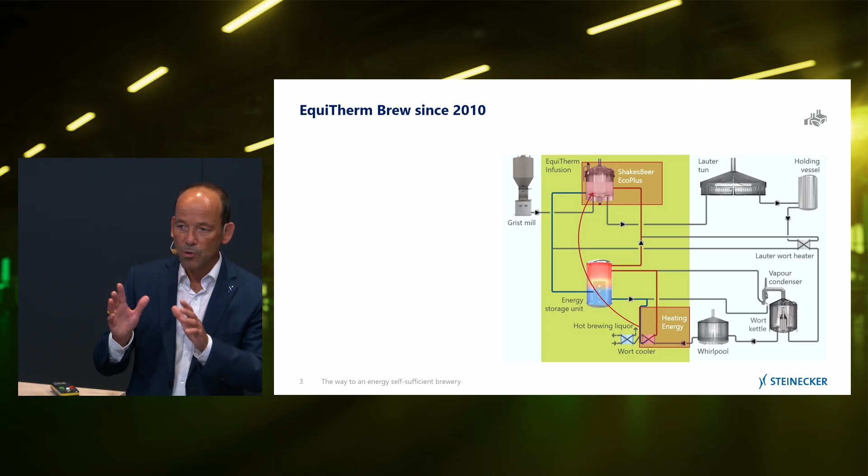So in the year 2010, we introduced a second energy balance in the brew house, reusing surplus heat energy from the wort chilling process for heating the mash tun. So the mash tun is not supplied anymore by steam from the boiler house. Only the wort boiling is supplied.

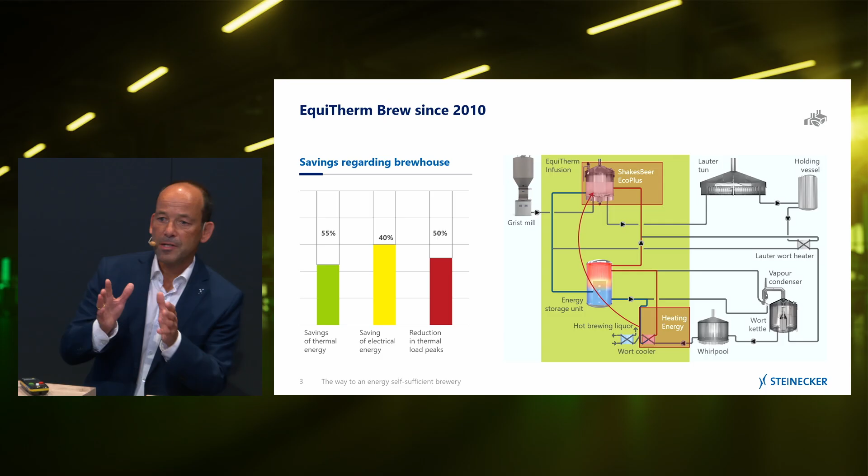So we can save a lot of thermal energy, also electrical energy in terms of cooling, because we do a part already in the cooling process with this energy balance. And what is also very important, we have only this one consumer, so we don't have peak loads to the boiler house. So the peak loads are reduced, therefore we can also reduce the capacity of the boiler.

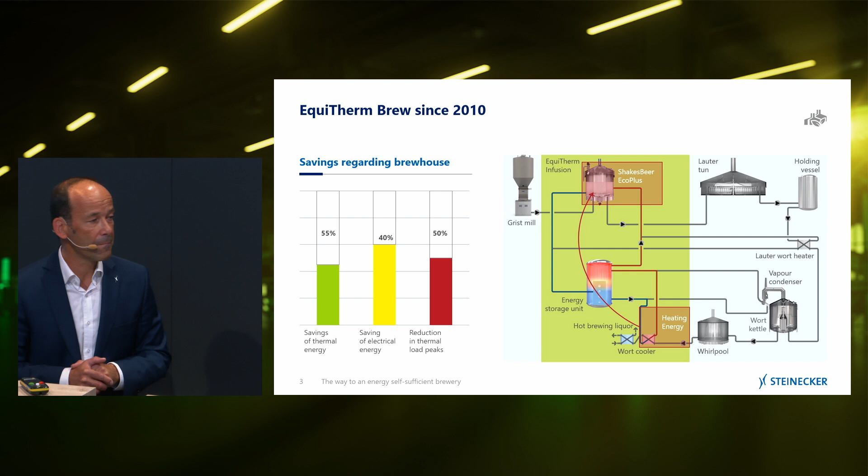And the same idea we had with Equitherm, we spread it out for the whole brewery with our Krones network of experts from Flensburg, Neutraubling, Freising and Rosenheim. We developed a holistic concept for the whole brewery. And really, this concept is able to produce self-sufficient beer. Not only produce, also filling.

Sounds really good, but now we see 2010, 2016, that's a couple of years ago, of course. Is this an established technology standard by now? Yeah, the Equitherm is well established. Around 100 million hectoliters of beer are produced yearly with Equitherm, and each brew house we send to our customer is Equitherm or at least Equitherm ready, meaning in a second step it could be easily retrofitted from a steam supply to a low temperature hot water supply.

Okay, and I love the graphics here on the right side. It looks like a closed loop to me, which is usually good. I have learned that by now. But for the non-engineers here, could you walk us through the process quickly?

Yeah. So one of the basic ideas is to use the energetic potential of the biomass which we get during the brewing process. So from malt, spent grain, malt dust, and so on. We convert this biomass to biogas, and then with biogas we feed a combined heat and power plant.

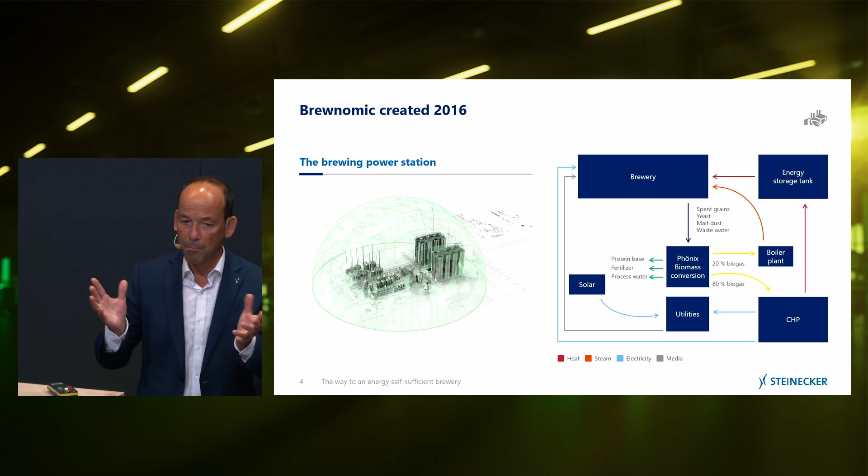And with this machine we produce enough heat energy and electrical energy to supply the complete brewery. And you said that breweries can become self-sufficient in terms of energy, and this is exactly how it's done? Yeah, it's not so easy as it's shown here. But it's like in a private life.

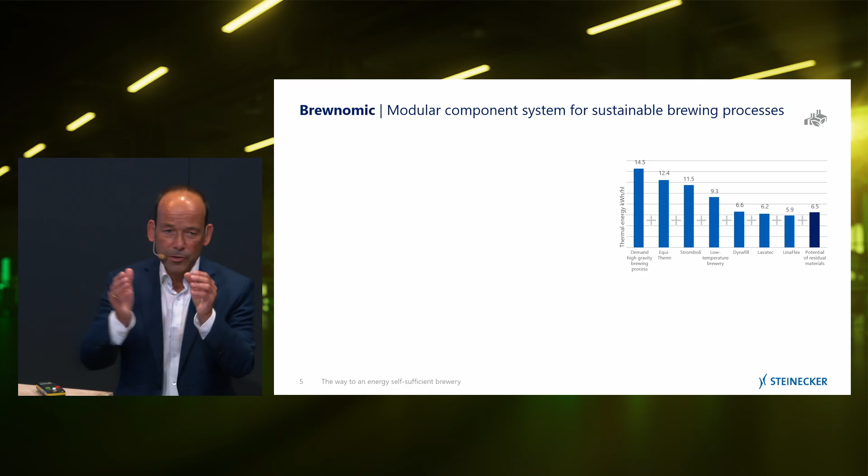If you want to heat your house with a heat pump, you should first reduce the heat demand of the house. So insulate the walls, invest maybe in high insulated windows, and then you can choose a smaller heat pump, and this covers the whole demand. And the same idea we use. So we invented a bundle of measures to reduce the demand of heat, but also of electrical energy. So we drew really to very low figures.

And because we have so many possibilities to achieve these very low figures, we can also create a development plan for existing breweries to bring them to Brewnomic standard. And the second core idea is we introduced a central energy storage tank in the brewery, and this storage tank divides or separates the demand, the consumers, from the supply. So all load peaks which the consumers create, we can completely buffer by this central storage tank.

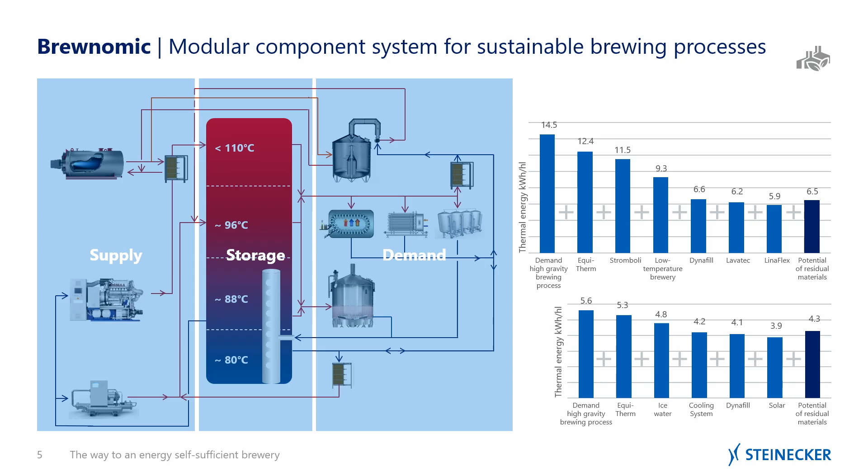So therefore, the boiler house can be designed small. It just has to cover the average consumption feeding into this buffer. And so the boiler is reduced, or we have now also the possibility, and this is much more important, to introduce very efficient machines like combined heat and power plant and like heat pumps. So they're running then continuously efficient, and that's the way to net zero.

Okay, to me it makes perfect sense, in theory at least. So why haven't all breweries made that switch yet? Yeah, as I explained, the $1 billion question. It is, in the first view, a big move to reach these low numbers. But, as I mentioned, we have enough measures, and we accompany our customers on their sustainable journey.

So each time they have to substitute old existing process equipment or utility equipment, we use one of these Brewnomic measures to insert in the brewery, and then the customer saves energy because energy consumption is reduced, and saves money. And with the saved money, they're able to invest in the next step of optimization.

Now we're talking, and now I want some real-world examples, success stories, maybe to convince those who still have doubts. You have some for us? Yes, we have a real latest one for a greenfield project. So the brewer family Maisel decided to go with Brewnomic for their new brewing project called Bayreuther Brauhaus. And it's being built now in Bayreuth.

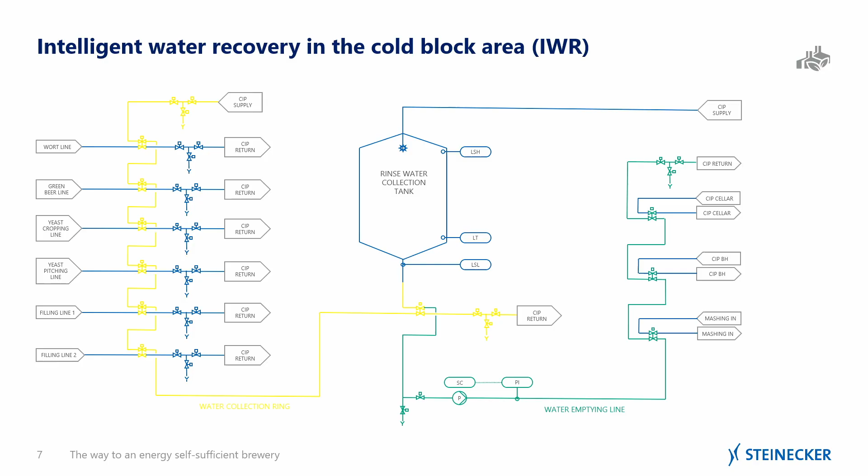It's an easy task: using the push-out water from the lines in the cold block of the brewery, just collect it in a buffer tank, and then reuse it for mashing in the brew house, for sparging, but also for pre-flushing in the CIP. Without any treatment, this reduces the already good number for freshwater demand down to below 3 hectoliters per hectoliter sales beer. And if we introduce a hydro circle, then we see 1.7 hectoliters freshwater demand per hectoliter final beer.

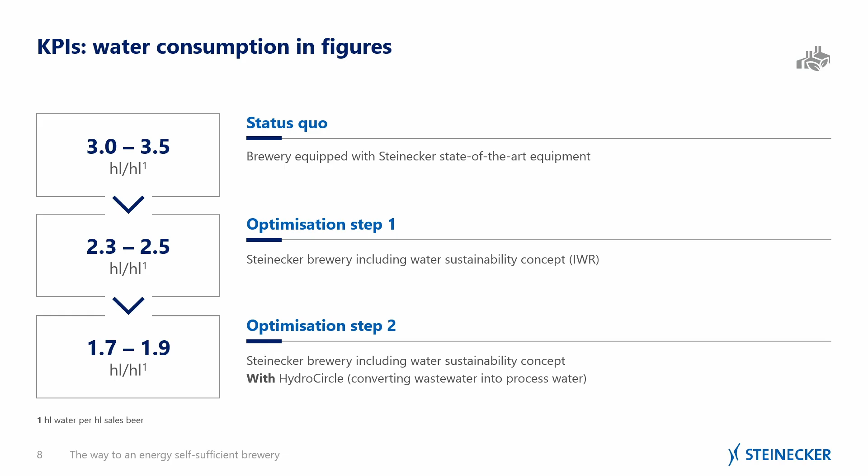Wait. For, let's say, 100 liters of beer, you only need 170 liters of water. In other words, only an additional 70 liters for both production and filling process. That's incredible, isn't it? Fantastic numbers and realistic. And if you compare to 10 years ago, it's 2 to 3 times less than in the old days. So not only energy, we shrink down to a minimum the media consumption like water. That is really amazing.

Okay, I still have one question. I have no idea what all this has to do with this electric kettle that you brought. I know that autumn is around the corner, and so is flu season, and warm beer is supposed to be good against the flu. Still, I'm feeling fine and prefer my beer cold, so please tell us, what is it about? Me either. I don't want to heat our fresh, delicious beer with a kettle.

No. If you remember, I mentioned Brewnomic and the effect of Brewnomic on the installed heating capacity. It's just an example which we really achieved in the Löbau brewery. Here we really tuned the brewery, and in the end the installed boiler capacity is 90% less than similar sized breweries. So only 400 watts, and this kettle stands for 400 watts installed heating capacity, is sufficient to produce 100 liters of beer. These fantastic numbers are realistic, thanks to 10 years of Brewnomic experience.